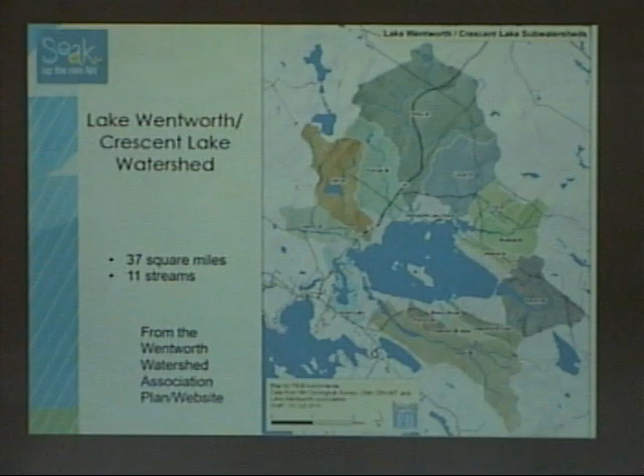Think back to maybe elementary school and the water cycle—it's a really nice natural cycle. It rains, the water flows downhill, some of it infiltrates into the ground and gets into the water body, some of it evaporates and goes back up, and you have this cycle going around and around.

Then people come around and start developing an area. They put in all these hard, or impervious, surfaces—roads, parking lots, buildings, rooftops. If you imagine what that's doing to that natural cycle, it's really interrupting it.

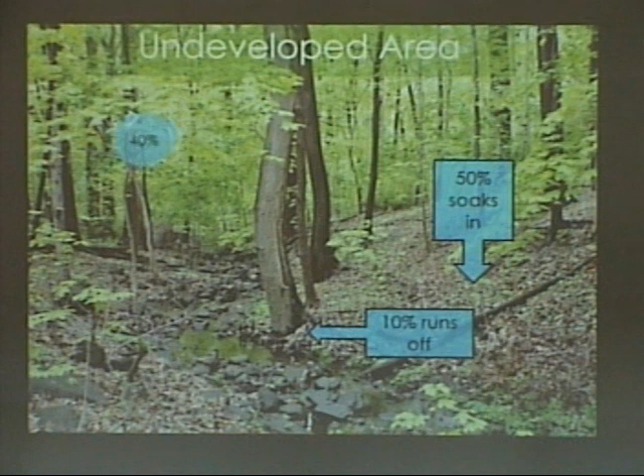Another thing to think about with the water cycle: in a nice undeveloped area like a forest, with a great canopy above, an understory, and a natural mulch of leaves below, 50% of the water soaks in when it rains. Only 10% of that water actually flows off into the stream—the rest infiltrates in. And 40% goes through that water cycle with the vegetation, transpiring.

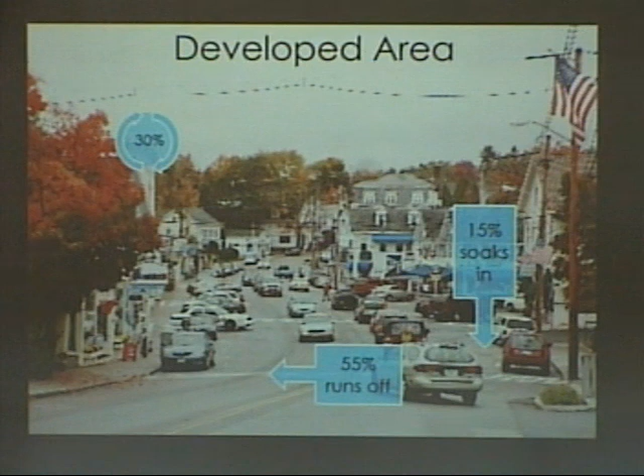Here in Wolfeboro, when you put in all this impervious surface, these hard surfaces, it creates almost a flip of what's happening with the natural cycle. Now only 15% of the water is soaking in, and 55% is running off—into Lake Winnipesaukee, into a storm drain, maybe going directly in. It's not soaking in anymore, it's not infiltrating. And because we don't have as much vegetation, there's a lot less of that natural cycle happening above.

So all this water that's running off these surfaces is what we call stormwater, or stormwater runoff.

Stormwater itself will sometimes infiltrate, but when it's running off, we call it stormwater runoff, though I'm going to just refer to it as stormwater. Some people talk about non-point source pollution, and there's a lot of other technical ways to describe it, but we're going to call it stormwater. As it runs across surfaces, it picks up a lot of different pollutants along the way. Think about what's on a roadway, in a parking lot, even on a grassy area where it's compacted, it's picking up oil, grease, fertilizer, salt, sand, all kinds of things.

So I'm going to talk a little bit about why we should really care about this. In New Hampshire, we really expect our water to be clean enough so that the fish will survive, that all the little organisms that they eat will survive. We also expect to be able to go swimming without really worrying about getting sick in our water bodies.

At the Department of Environmental Services, we do a lot of monitoring out there where we're testing water, and you guys do here on the lakes too. What we find is that when a water body doesn't support some of these things that we want it to support, like drinking, fish, or swimming, then we call it impaired. It's too polluted for what we want to use it for. And there are a lot of impaired waters in New Hampshire.

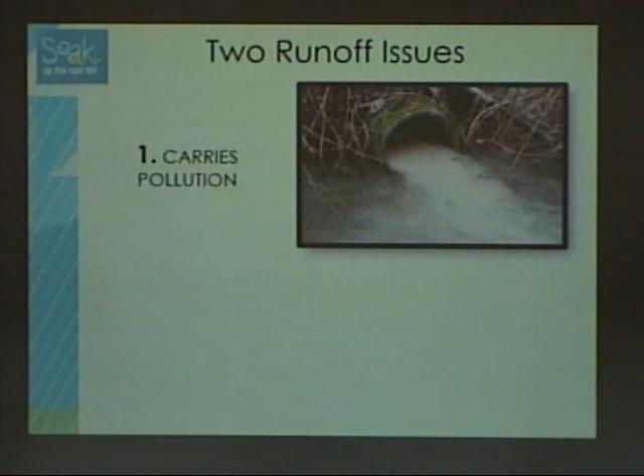I'm going to break it down for you into two issues that we're concerned about. The first one is that it's picking up pollution and carrying it to the water body. The other one is that there's too much water because it's not infiltrating into the ground, it's running off.

When you think about water pollution being carried, it could be water flowing over a compacted grassy area or flowing right into a water body, picking up pollutants along the way. It could be flowing along a roadway, a dirt road, or even a paved road and getting into some sort of trench or swale, picking up sediment or dirt along the way. Or it could be coming from a nearby parking lot where there's a storm drain, picking up all the different types of toxins and pollutants related to cars and trash, cigarette butts, going into the storm drain.

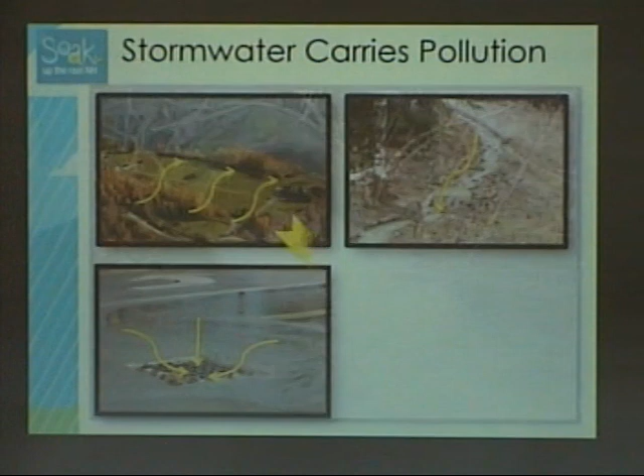No matter where it's coming from, though, and however it gets there, it eventually ends up in a nearby water body untreated. A lot of people think it's going into a storm drain and getting treated. There's maybe some catchment for sediment, but the water is not actually getting treated.

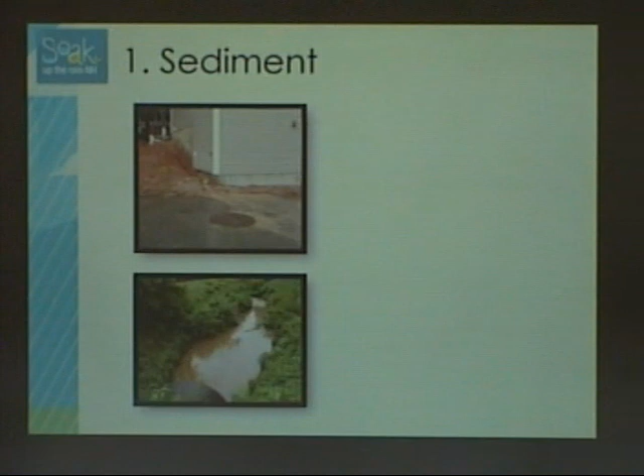So I'll talk about four different causes or sources of pollution that you might want to think about, especially things related to landscapers. The first one would be sediment, which could be from pretty much any property that has an issue with erosion. Maybe the vegetation isn't growing well, or somebody's building a house, there's construction going on, or it's a roadway—there are all kinds of different causes. It seems harmless, it's just dirt, but it is not, because when it gets into the water bodies, it can create a problem, actually making the water very cloudy. It's difficult for the fish to see, and it smothers a lot of their habitat, the vegetation, and the smaller bugs.

The other one is nutrients, and we talk about nutrients as phosphorus and nitrogen, which is something landscapers see all the time. Normally that's good because it makes plants grow—we need both phosphorus and nitrogen. But when there's too much that gets into our water bodies, we run into issues with the vegetation taking over. I'll give you a little demonstration of this. Phosphorus and nitrogen could be coming from too much fertilizer, or from a septic system. The plants start to grow, and then in the water bodies they start to grow too much, so you get that problem with algae blooms.

It's actually feeding, if you have invasive species that aren't supposed to be there, it's feeding those a lot more nutrients, causing them to take over and grow like crazy. Then the water's cloudy, doesn't get as much sun, and eventually plants start to die off. The microorganisms are decaying them, eating all those plants, and taking up the oxygen.

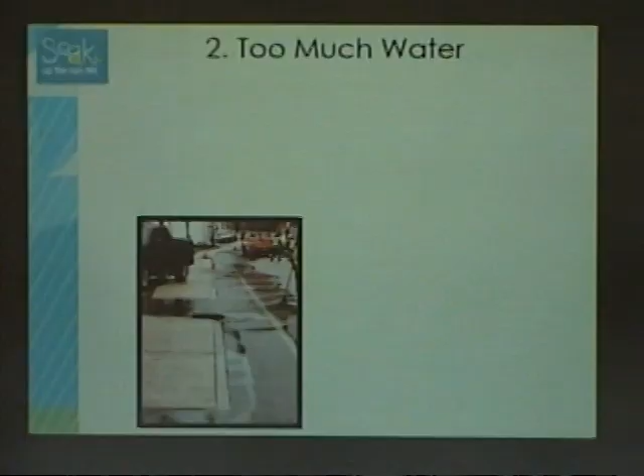So that's the pollution side, and then there's the too much water side of this. That really is an impact because as it rains, most of you probably noticed our storms are more frequent, more severe, we're getting these downfalls that happen very quickly, and then they hit this impervious surface and don't have an opportunity to soak in. So they're really taxing our infrastructure, our stormwater systems, our catch basins, and also the natural infrastructure. This is Newmarket last October, which was not a very bad storm, and it could not handle it.

So we have flooding, to the extreme a lot of times, where our infrastructure like our culverts and bridge crossings aren't big enough to handle them. So it's blowing out or destroying some infrastructure.

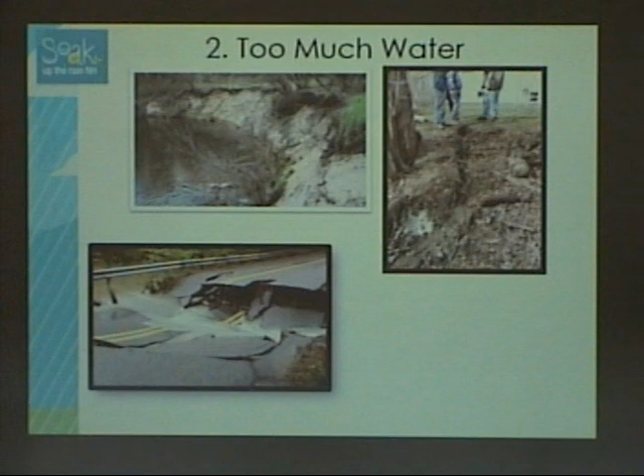It causes erosion when there's too much water. In cases where you have a stream or river near a lot of development and all the water goes to that stream or river at the same time, it becomes very flashy. That can cause erosion on the banks, and then the sediment goes downstream, causing problems down there. The trees start to become uprooted, they fall in, they're no longer a nice buffer, you no longer have that shade for all the organisms. It destroys roadways and other infrastructure too, so it's a huge issue.

And then the other extreme of it is that we've had droughts in certain parts of the state this past year, and it exacerbates that problem because you're no longer replenishing your groundwater.

So this is kind of bringing it down to the home level. This is a typical home, kind of like your backyard or whatever, and this gives you an idea of how it works.

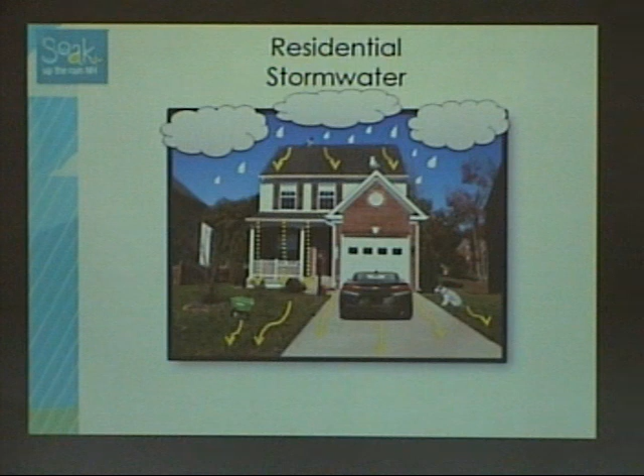It rains, the rain hits the roof. You might have gutters, you might not. If you don't have gutters, the rain flows over the roof, might go over the drip edge, goes down to a pretty compacted lawn, picks up any excess fertilizer. If you do have gutters, it's going to hit that driveway, pick up everything from the car, or maybe from the pet that you have that you didn't pick up the waste from. It drains then to the catch basin or directly to a water body.

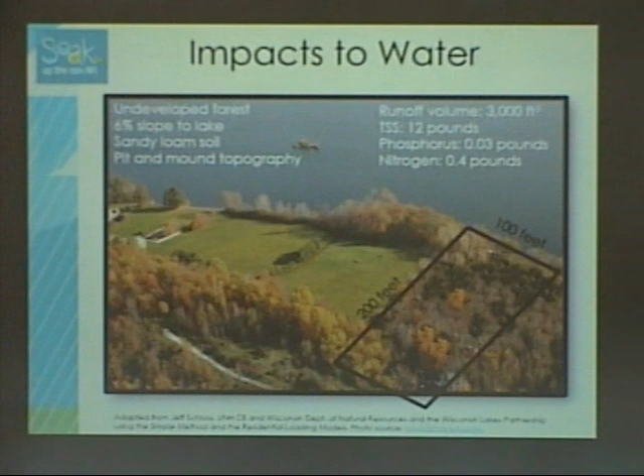So that's on the micro level. Here's another example of what happens when people develop a piece of property. We have this nice undeveloped piece of property, nice slope, some nice sandy loam. It hasn't been developed or cut in a long time. You don't have to think about these numbers other than they show you this is a natural environment. It has TSS, 12 pounds of sediment, and the phosphorus and nitrogen coming off that property is pretty low.

Then they come along and develop it, and we've got this very long driveway, a lot of impervious surface, a big house, and a nicely maintained lawn. But now we are basically creating much more runoff—5 times more sediment, 16 times on the phosphorus, and 7 times on the nitrogen.

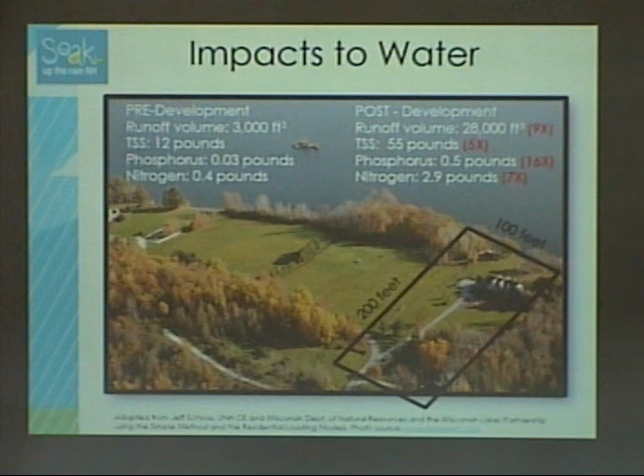So I think, Lisa, you're up next. I don't know if you have any questions. Lisa's going to talk about the next step—what to do and how to do it. Yes, Jack.

Early on, you referred to sediment as dirt. Is there some dirt that's worse than others, more of a problem? One thing I forgot to mention is the other problem with sediment is that it will pick up a lot of the different pollutants that are out there. So a lot of those toxic pollutants have a pathway to get into our water bodies through sediment. It will carry a lot of the things we're concerned about in addition to nutrients. There's things like roadway sediment, which might have some chloride in it. So that's another thing we worry about on that end. I don't know, are you thinking of something specific?

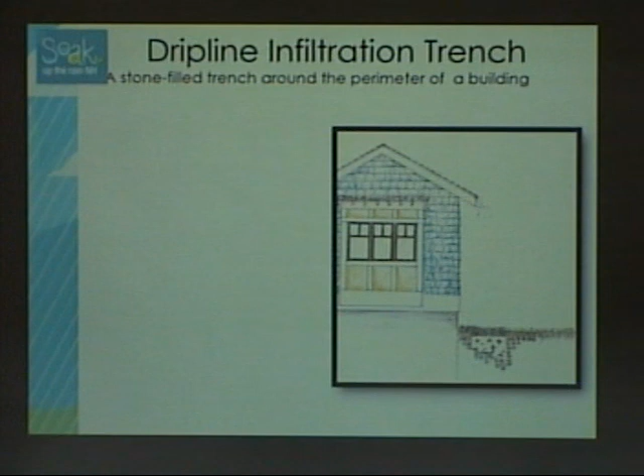You can put a perforated pipe in the bottom of it so the water moves out and away to some place where it can infiltrate, and that's part of the instructions you'd see in the booklet. If you were to see one, it might just look like a splash guard, but if there's a sub-base under there, it's trying to be an infiltration device.

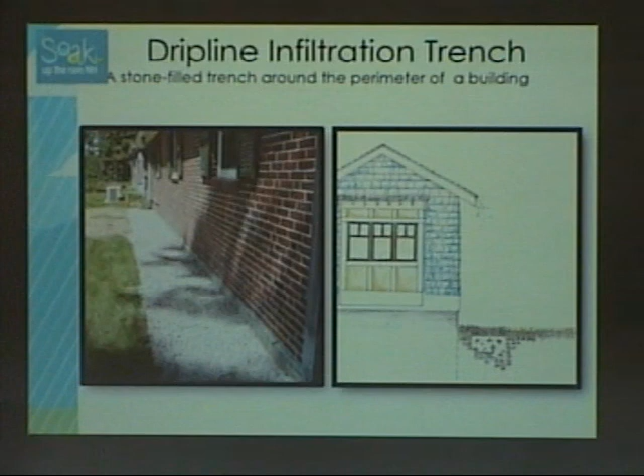A similar practice is a driveway infiltration trench, so that if your driveway is crowned such that water sheds off and runs down the edges, you could capture that water so it doesn't run down the road, as Barb was saying earlier. This is an example we partnered with Phillips Exeter Academy to work with their students on Climate Action Day, I think that was 2016 or 17.

There was water coming onto this driveway and moving down the hill into the Squamscott River. We worked with the students to install an infiltration trench on 2 sides. There's 3/4 inch clean drainage stone under there, and then we topped it with a decorative stone.

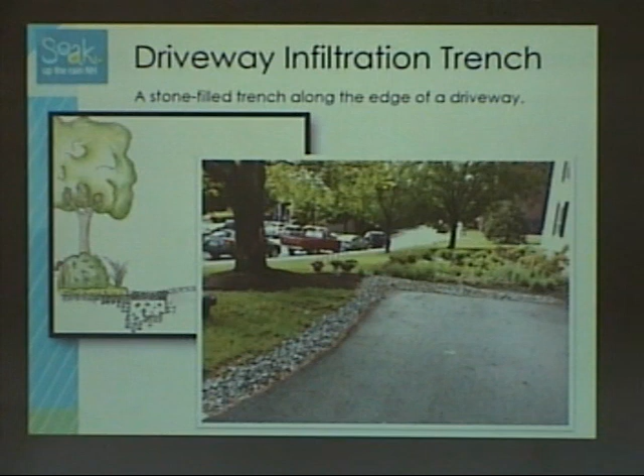We did one of these on a project in Greenland with our partner Soak Up the Rain Great Bay, where we put in 10 practices with them. They had a grant through the state, and one of them was a dry well on a property. You dig a hole, you line it with geotextile fabric to prevent soil from migrating in and taking up the pore space, so the water can move in there.

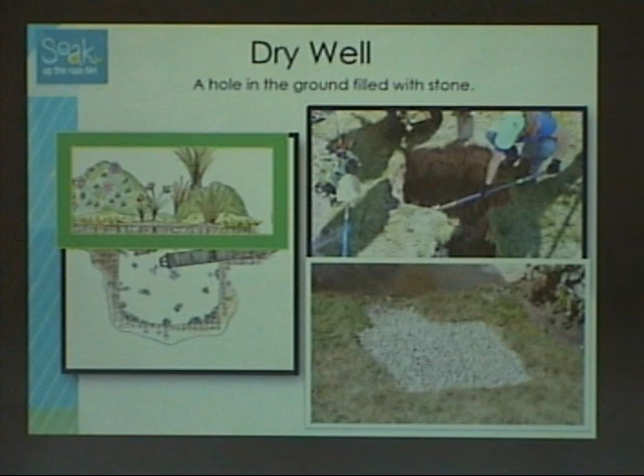In this version of the guide, we added how to enhance these practices wherever we could with vegetation. You can plant on top of a dry well. There are instructions that tell you to put a layer of fabric, some soil for a planting bed, and then to plant on top of it. So you're treating the stormwater, but you're also beautifying your property and adding the ecological benefits of native plants. If you use native plants, you could be adding pollinating plants and stuff like that.

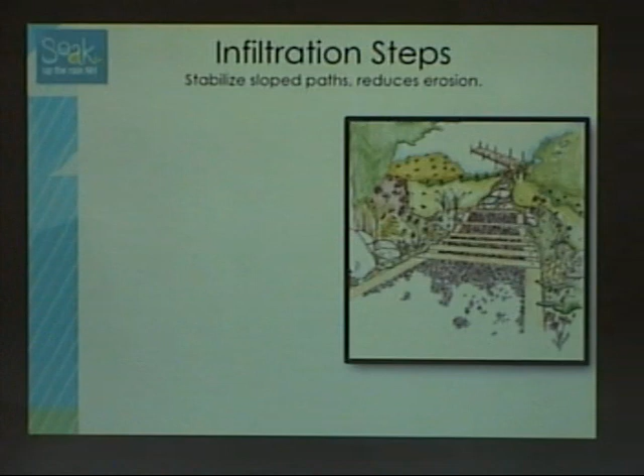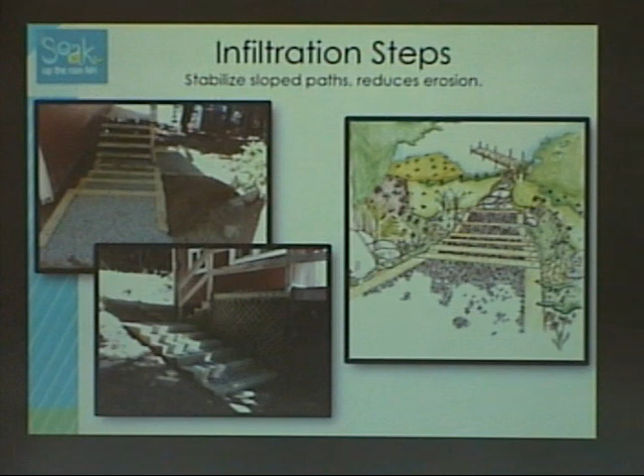These are built with, I think, 6x6 timbers, and they're pinned in with rebar and then backfilled again with that 3/4 inch clean stone, so the water can infiltrate instead of just tearing down and eroding.

Anything from plain concrete pavers to something more decorative, and I think there's a guy in the back there that's got lots of different types to show you.

Rain gardens are the big deal right now.

Have any of you put in rain gardens with clients or at your house, or had interest in them? Any landscapers have had clients asking, do you know what a rain garden is?

A rain garden is basically a perennial garden that is sunken down below grade. The water is directed into it so it can slowly soak into the ground.

This is a picture of one that we did in Greenland. I have a little graphic and then a picture of that. The key feature of a rain garden is really that ponding area. You can see the top of the grade there, the grass, so that's the original grade. And there's the top of my garden, so there's space between there.

Along comes a storm, and that rain garden fills up. Then as the storm passes and the sun comes out, that water slowly soaks into the ground.

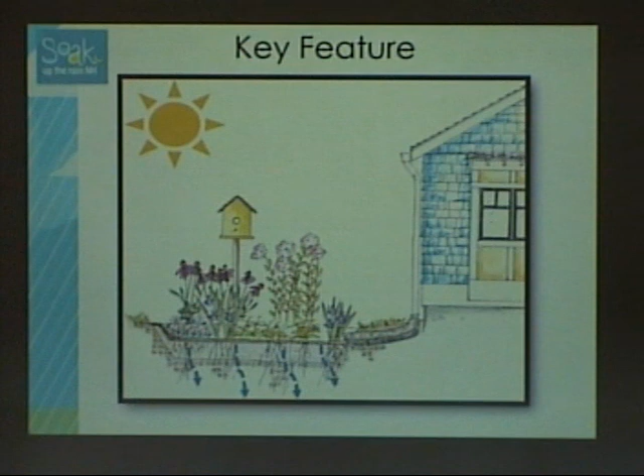Other than that, there are some features like the inlet and an overflow outlet, but you can put just ordinary perennials, but common perennials in there. We worked with Cooperative Extension to develop a rain garden plant list, which is on the back table. So if that's something you're interested in, be sure to get one of those.

Of course, they do need maintenance. All of these types of practices need some sort of maintenance or another, and that's addressed again in the homeowner's guide. We certainly write about that.

So those are the 6 infiltration practices. Like I said, they're meant specifically to direct the water right to them. But sometimes you don't have a place where you can infiltrate the water, but you need to do something about it. You don't like where it's running. So there are 4 additional practices for collecting it or directing it or otherwise trying to help out somehow.

For example, the good old-fashioned rain barrel. Just to capture it and store it for later, or put a hose on it and direct it to where you want.

This is a project we did again with Soak Up the Rain Great Bay, where we had a roof. The big deal about rain barrels is they fill up really quickly. Less than 100 square feet of roof with 1 inch of rain falling on it will fill up a rain barrel really quickly. So in this case, the homeowner was able to split the gutters so they went in 2 different directions, and we put rain barrels at each end.

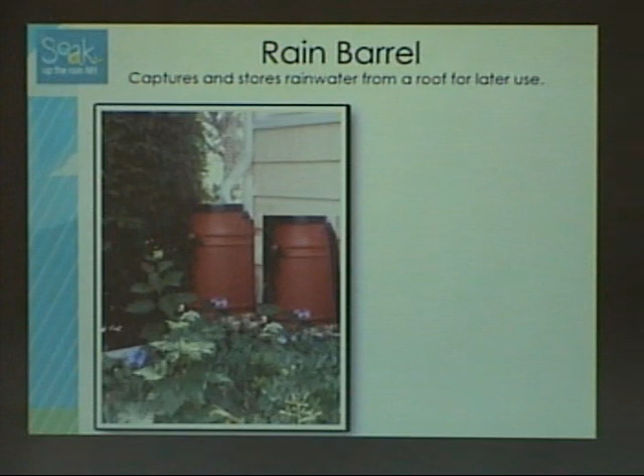Water bars, I think, are so cool. I love putting these in. They're for a sloped area, not super steep, but you may see these if you go out hiking, on trails or at camps where you have a slope in maybe a high use area, and the water is slowly making its way down.

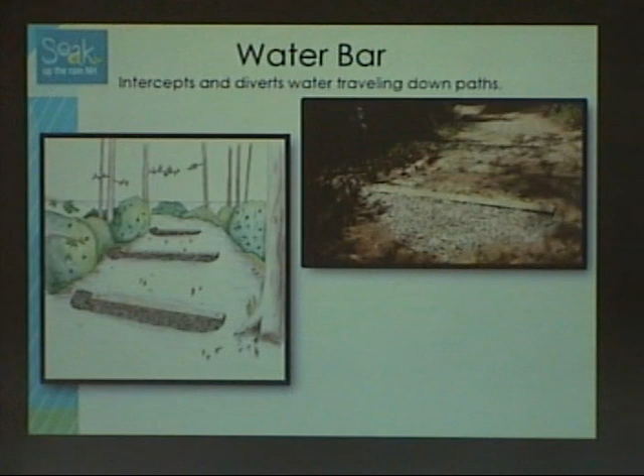This is the type we put in at Camp Robin Hood up in Lake Ossipee, where you put them at an angle on the slope, so as the water comes down. I should also say that behind the bar, you dig a trench and fill that with that same 3/4 inch stone. So as the water comes down, it hits the bar, collects in that trench area, and then moves off into a vegetated area.

You can see they're done in a series. I think we put 5 in there.

And that way the water comes down, hits that bar, moves off to the side into a vegetated area through that trench. The rubber razor is there both to catch the water, but it's also nice because you can drive over it with bicycles, golf carts, or maintenance trucks.

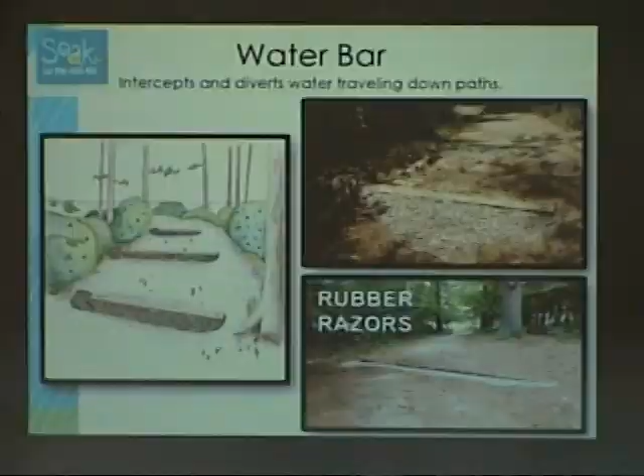One thing about water bars, though, is you can't use them on roads that are plowed because you'll just tear them up. But they're great, especially for wide areas of heavy use where steps, it's just too stretched out to put steps in, for example.

A vegetated swale is simply a channel that moves water along, but you put plants in it. We've all seen swales and ditches along the sides of the roads, but if you can put some plants in there, they help collect, they make pockets where water can collect and get absorbed by the plant or soak in.

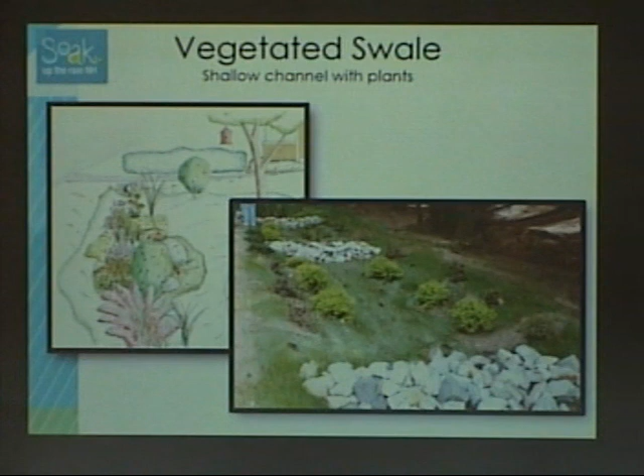This is a vegetated swale that was put in through our 319 program. It was a different type of program, but still a stormwater management program, where they added big riprap to create check dams. They help the water build up behind the check dam, where some of the sediment can settle out, and the water can maybe soak in during a big storm. Again, they're done in a series, so the water maybe fills up behind one, overflows, goes behind the other. Meanwhile, the vegetation is doing its job to pick up pollutants and soak up water.

A vegetated buffer is simply an area of vegetation between your landscaped area and the water body. So as Barb mentioned, lawns, a lot of people think, well, I have this big lawn and it's going to soak up water. After a little while, lawns can become compacted and shed water. I'm sure some of you have seen that, water just running off your lawn.

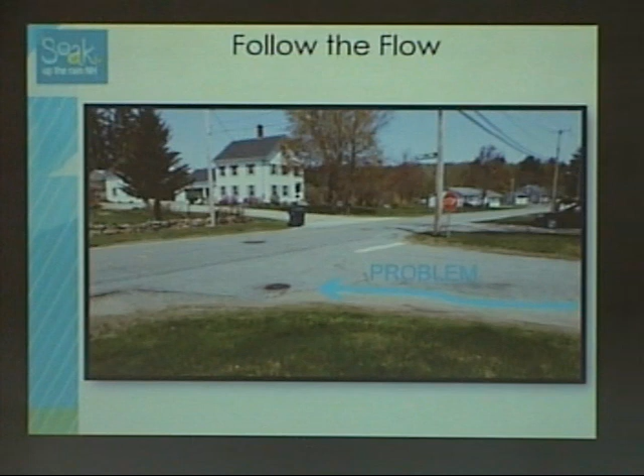Well, let me go back one more. Most of these on the front were going into a grassy area and the water was being somewhat soaked up. It didn't seem like a big problem. But here it was running down the driveway out into the road, and we asked, is there a problem? Well, yes, it was picking up that sediment and those other types of pollutants that Barb was talking about, dirt, oil, grease, maybe some toxic stuff from vehicles, going into that catch basin and dumping into the little river right behind it. So for us, that was a fantastic opportunity. That's that same downspout in the corner.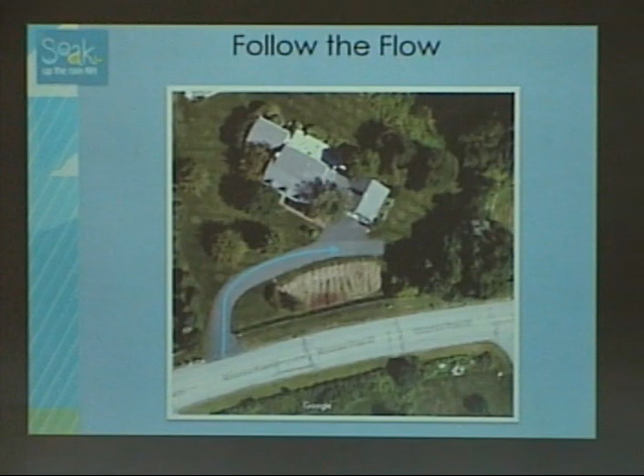This is, again, a project we did with Soak Up the Rain Great Bay, where this house was receiving runoff from a little bit from the road, from their big driveway. This is the garage down there at the bottom of the photo, where that water coming down the driveway was joining. You can see peeking out from the bushes there right next to the garage, there's a downspout. So roof water, too, was joining, moving across in front of that garage and going into this grate. We opened it up and said, what's going on here? Just following that flow.

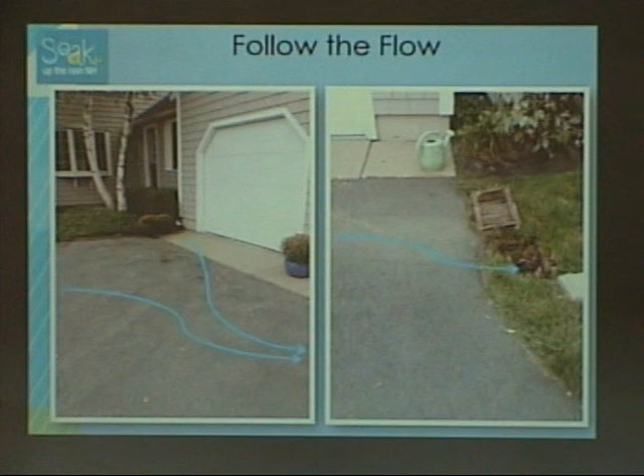And we found that pipe, if you can see that little pipe in the bottom of that grate. That was hooked to a pipe out back that was dumping all this water into this pond that overflowed into Great Bay. And if any of you know Great Bay, that has pollution problems of its own. So for us, that was an opportunity. You can see the white pipe there, that's the beginning of that overflow, the pipe that went out to the pond.

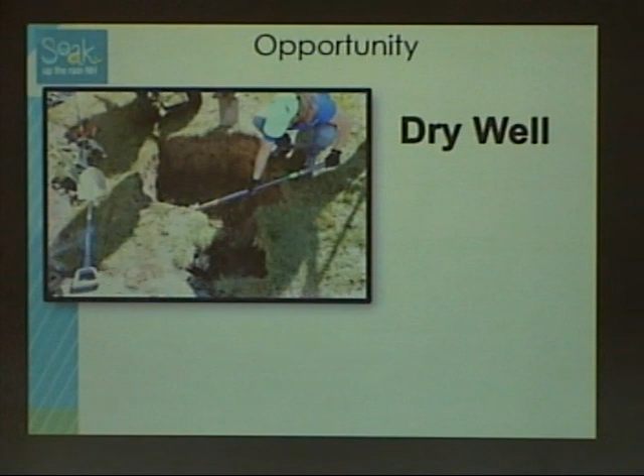So we directed the water past that and into a dry well. We dug the dry well, lined it with the fabric like I was mentioning, and then we put this overflow pipe in it so that any overflow, once the dry well fills up in a larger storm, it'll still go out to that pond, but meanwhile we've caught a whole bunch of it and we're soaking it up.

And then we stand there and we be very proud of ourselves and have somebody take our picture because we feel like we're doing good things.

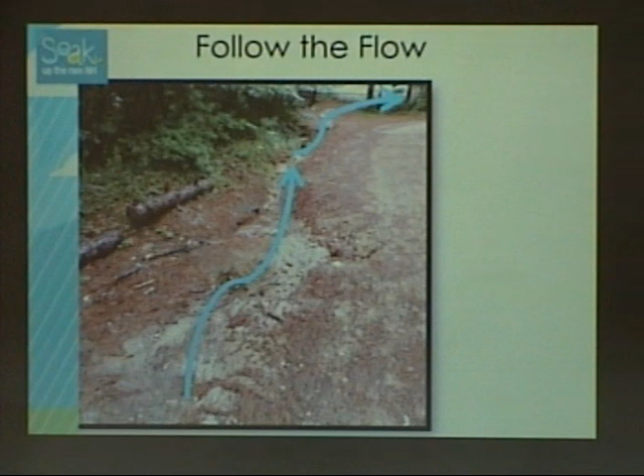This is the camp I mentioned, Camp Robin Hood at Lake Ossipee. This was an area, you're standing on top of the hill where there was some lodging, and there was this big path that people used in golf carts and the kids, and they would go down. There's another lodging building there, right at the top of the picture, you can see a little bit of white there. This stormwater was just tearing down this hill, wrapping around the building, and coming around the corner, and again, tearing down.

They had some sort of steps there, I don't have the full picture, heading down toward the lake. You can see they took a downed tree that was on the property to put it across there to try to block it off. So we thought, wow, this is not only a great opportunity to do something about the stormwater, but it was a great opportunity to work with the campers.

We partnered with the Green Mountain Conservation Group. She facilitated this project, and we worked with the campers and counselors to rehab where the water was coming around the corner. I didn't show you that very well, but there were some steps there that were just filled with sand, muck, and pine needles, so we cleaned those out and retrofitted some stormwater infiltration steps.

So that left-hand photo is that hill that I showed you at first, and those are the set of water bars we put in. And then we put the infiltration steps along the side there to capture more of the stormwater that was coming around.

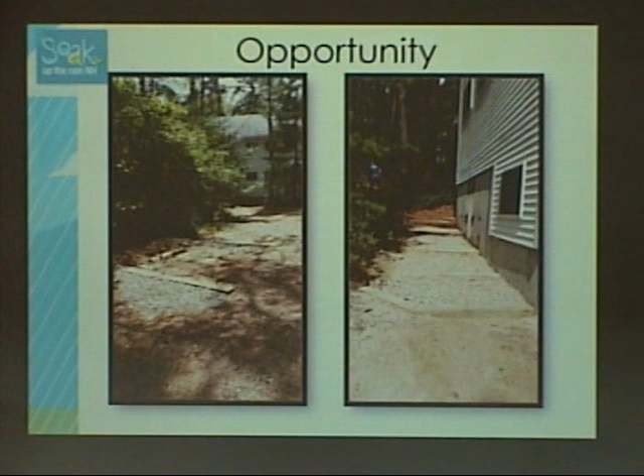And I understand that you have milfoil in Wentworth, so the fertilizer not only will cause overgrowth of the native vegetation, your natural pond weeds, but also of those invasive species like milfoil.

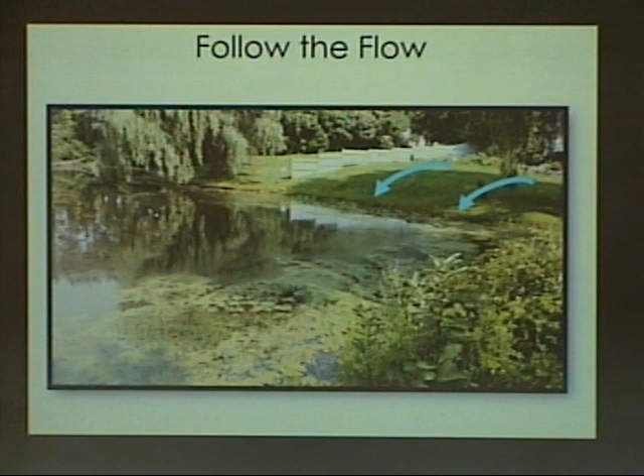So if you have overgrowth, algae, as Barbara mentioned, can have algae blooms in ponds and lakes. And I always say green lawn, green pond, because we just see it over and over again.

So real quickly, I also want to say that when we decide okay, we see a problem, an opportunity, we want to know if the soil will soak up the rain. So there's 3 types of tests that we do.

The first is a simple perc test, which I'm sure most of you are familiar with. We dig a hole, we fill it up. We usually let it drain out once and fill it up again just to make sure we get a really good test. Especially for a rain garden, you want that 12-inch deep hole to drain within 24 hours. Other infiltration practices could have a slower infiltration rate, but you want to make sure the soils will soak up the rain. If that hole just has water in it for days and days, then you don't want to put an infiltration practice in there.

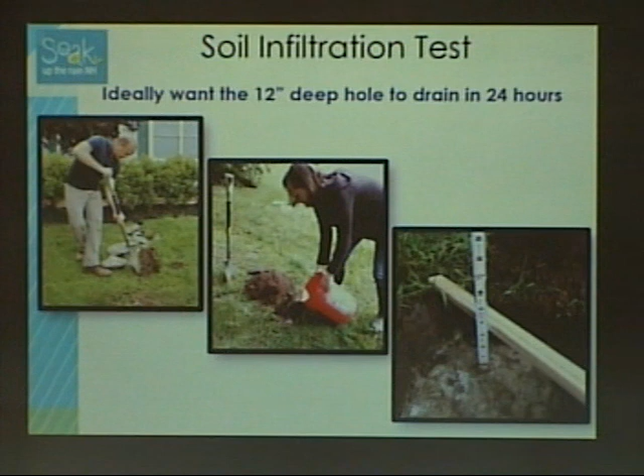A soil ribbon test is another test you can do. You get a handful of that soil, enough so it'll stick together, and you try to squeeze out a ribbon between your thumb and forefinger. A sandy soil won't make a ribbon, and that's good news for infiltration. If you can make a big long ribbon with that, you've got clay in that soil, and it's not going to be very good for infiltration. So you need to think twice about putting an infiltration practice in there. You could use one of the other types of practices, but maybe not infiltration.

This I recently added, I call it the soggy test. Is it soggy? Is it squishy? Is it spongy? A lot of times you'll have people that think wet areas are great places for rain gardens, and they absolutely are not. You want to put rain gardens where the water will move in and soak in, not where it will stay wet. So if at any time of year, for any number of days, an area stays soggy, squishy, or spongy, just say no to infiltration because it's not the right thing.

I'm going to drive this point home because if you have a client that says, why do I have a puddle in my yard days after the rain has stopped, is that a great place for a rain garden? Say no. We had this problem actually - somebody who went through this type of training tried to put a rain garden in a place where it really shouldn't have gone, and the property owner called us to help them figure out what to do.

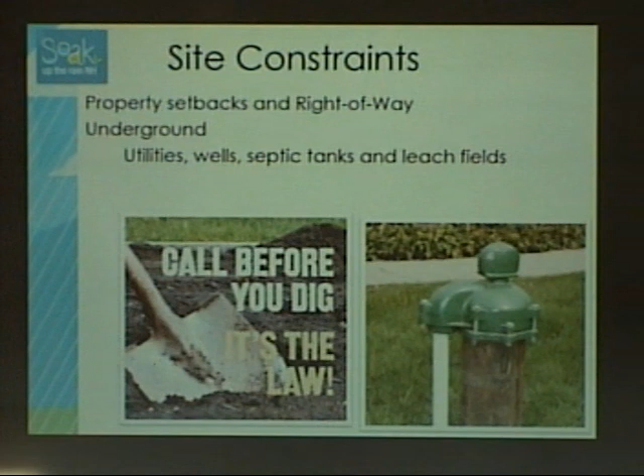So you want to stay away from wells and septic tanks, look for signs of big roots or big rocks that might impede your digging of a hole. Certain practices need to be on certain types of slopes or not. Of course if you're going to plant, think about your sun and shade. So there's lots that goes into it. And of course, what does the property owner want, what are their preferences? If nobody wants to maintain a rain garden, don't plant one there - but if you're a landscaper, maybe it's a great way to get some business. We'll put in this rain garden, we'll come back twice a year and take care of it for you.

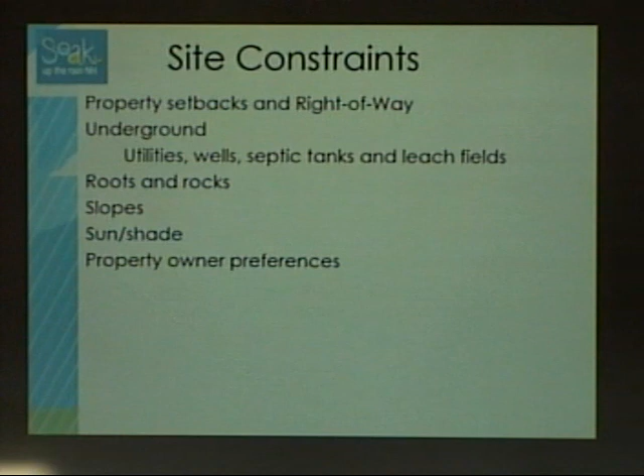So, of course, we don't expect you to memorize everything or have taken lots of notes and learned everything, so we encourage you to pick up one of those homeowners' guides to stormwater management in the back.

We also have this website, soaknh.org, or just look up Soak Up the Rain, New Hampshire. There is an EPA Soak Up the Rain program where they encourage these same types of things. It is a DES program, and if you've ever been on the DES website, it's not that beautiful or easy to navigate, but this website is completely different and unique. It's very user-friendly, very robust. We have flow charts that help you pick one of these practices by answering a series of questions, and tons of resources. If you want to look at somebody's yard and follow the flow like I just did, there's a field packet that tells you how to look at a house - the roof, the walkway, the yard, what's happening. So many resources on there.

And I think from here, Barbara is going to take over and talk a little bit more about the website. And should I pause for questions?

Okay, sure, yeah, thank you, Lisa. I'm just going to finish up, and then we'll have a few minutes for questions if there's time.

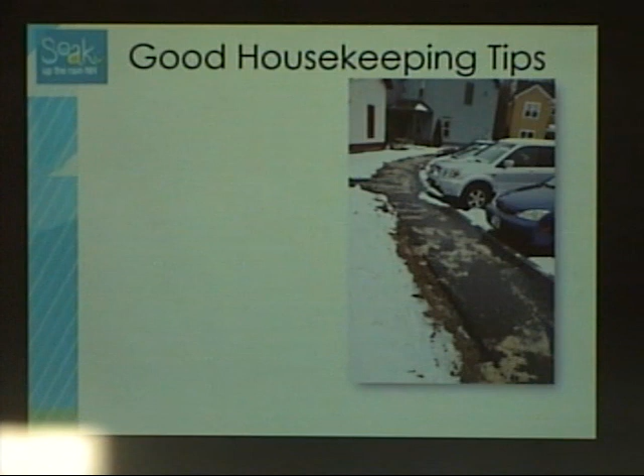This is a big issue in New Hampshire, and it's happening everywhere, but we have a lot of water bodies now that are actually impaired from chloride - there's too much chloride for the fish and organisms to survive. When we did data and research on that, we found that parking lots, private parking lots, are a big source. Highways and municipal roads too, but private parking lots and driveways can be quite a contributor.

So there's a program called Green Snow Pro, a certification program for people that do winter maintenance. You have to keep safety as your priority, but you can minimize the amount of chloride and salt you're putting down by being more efficient and effective, learning some of those techniques that are out there. The benefit is you actually get decreased liability, because you're certified, and if you show you're doing the practices the way you're supposed to, you're more protected on liability than you would be otherwise.

So we're really condensing a lot in here, and we're not able to go into a lot of things that some of you might be interested in, which is turf management and fertilizer, and some of the really great practices out there. There's a lot of science now behind what you can do to reduce the amount of fertilizer and what type of fertilizer you need, if you need any phosphorus, nitrogen, slow release, all those kinds of things. We have a ton more information on that.

I strongly recommend you take the training. We do the training about once a year in different parts of the state with UNH Cooperative Extension, and there is a certification that you get listed on their website as having taken the training. That's a little bit more than what you are getting today, and it's just really a great opportunity.

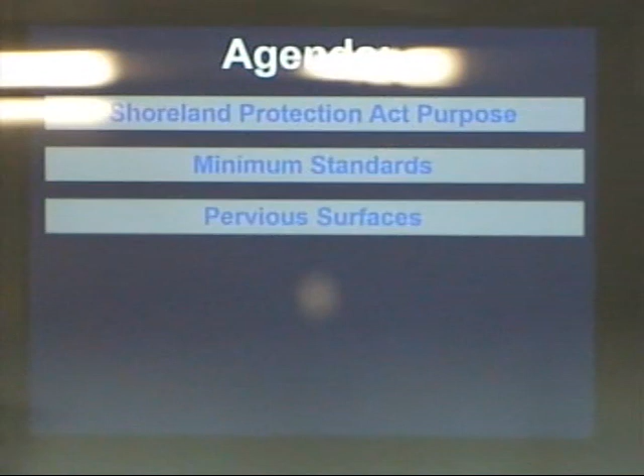We're going to talk about the Shoreland Protection Act, the minimum standards. I'm going to touch upon pervious surfaces—Barb talked about those a bit. We're going to look at the shoreland permitting process, and I'll touch quickly on erosion controls as well.

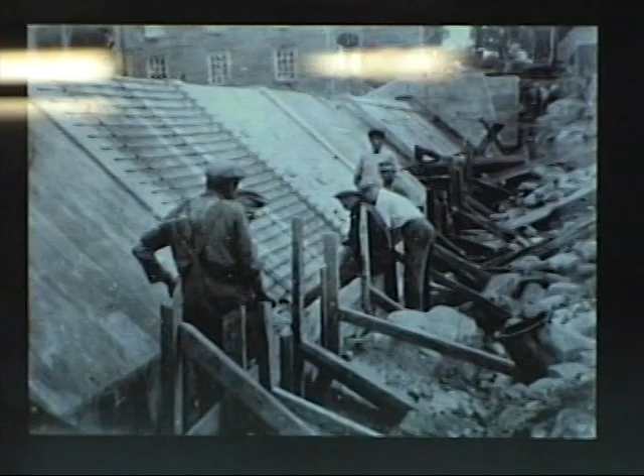Let's jump right into the Shoreland Protection Act purpose, the intent of the law. Once upon a time, a water body was inhabited just by Native Americans, and we arrived and started to install dams and raise the level of our water bodies. When you look at many of the water bodies, they were predominantly vegetated. The shorelines were primarily vegetated—nothing but large trees and natural ground covers.

Now, the take-home point is not that big houses are bad. What we're showing here is that there was a shift, a change in behaviors. Folks were bringing in a lot of the behaviors and lawns you'd see in typical urban and suburban environments, and putting them here in our rural areas of New Hampshire along our water bodies.

Shortly after we started rolling out these new behaviors and situations on our shorelands, we began to see a real decrease in water quality. Whenever you increase impervious area—surfaces that can't absorb and infiltrate stormwater—and eliminate natural vegetation, you see a decrease in water quality, because you're increasing the likelihood of stormwater entering or directly discharging into your lakes and ponds. Stormwater is your greatest threat to water quality today.

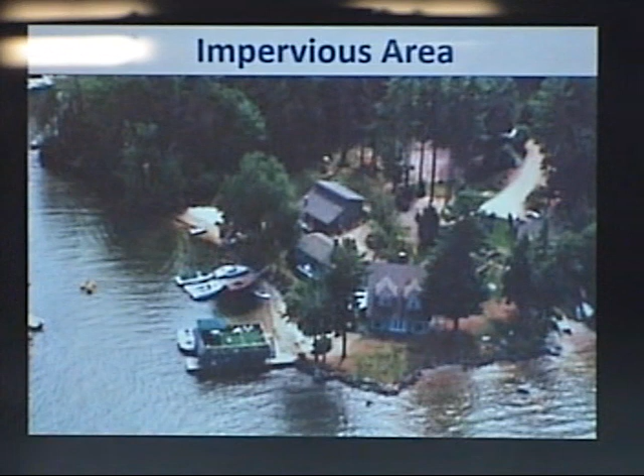When we look more closely at this area, you can see it's been carved up a bit—there's impervious areas and structures. Zooming in, you can see the shoreline has indeed been altered. Here are the gravel driveways. Technically they're considered impervious; they can absorb a very light rain event, but during a storm event there's sheet flow, stormwater racing across those surfaces.

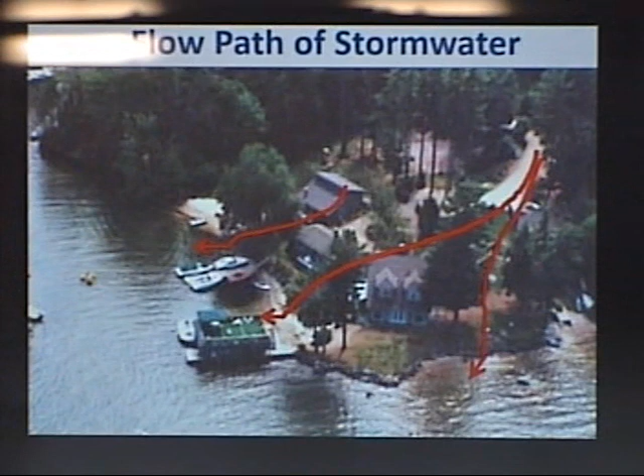So when a major front rips through with intense rainfall, there's stormwater racing off those surfaces, directly discharging into our surface waters—especially where the impervious area extends right down to the water's edge, or where natural ground covers have been removed and converted to lawn. What the Shoreland Protection Act is looking to achieve is to recognize those areas of our water bodies that are well-vegetated and retain them to the best we can, and also restore those regions already impacted.

Look at all the shade that these trees provide over these inshore waters. Barbara and Lisa were talking earlier about how providing shade over those inshore waters makes milfoil less apt to get established. Milfoil is not really a shade-tolerant species—it needs lots of sun to survive.

Here's a fantastic example of what we call a waterfront buffer, lots of natural vegetation within that first 50 feet. That's the real critical zone where the law is looking to retain natural ground covers.

Here's an area of a property that was restored. It was once a lot of lawn, a maintained area right down to the water's edge. A fair amount of restoration went into this site. Here's an excellent site where they put in additional vegetation to achieve greater levels of infiltration and more shade over the water's edge.

In general, just more of an environmentally friendly situation. So that's really the science and the intent of the Act. I hope if there's anything you walk away with today, you have a better understanding that the Shoreland Protection Act isn't just looking to save trees, it's really looking to maintain and restore vegetated buffers. It's looking to better manage our stormwater and provide some of the critical wildlife habitat that trees and natural vegetation provide along the shoreline. So now we'll get into the law itself and how the law actually achieves these things.

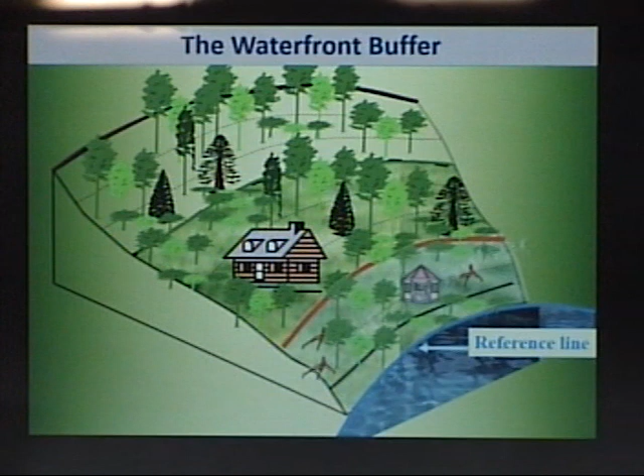If a property owner, developer, or landscaper has an interest in removing trees today, this is how it works. These are the limitations on tree removal. You divide the property up from the most northerly or easterly property boundary, always starting again from the most northerly or easterly property boundary. Then you divide the waterfront buffer up into these 25 by 50-foot grid segments, just like this. Score the trees based on their diameter.

Trees with a diameter of 1 to 3 inches are given a score of 1 point, 3 to 6 inches, 5 points. All trees 6 to 12 inches give a score of 10 points, and all trees greater than a foot in diameter are given a score of 15 points.

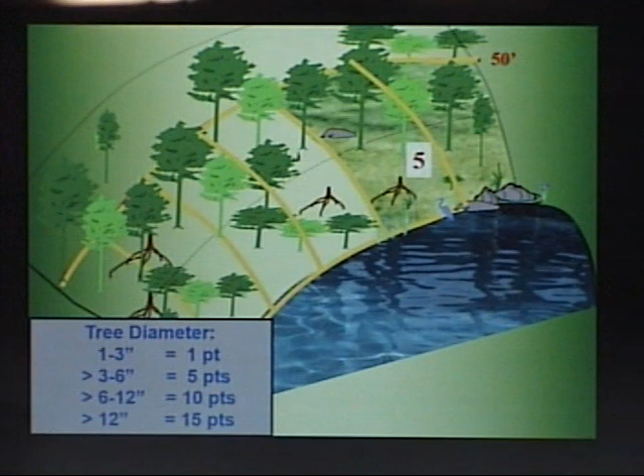If a property owner or developer has an interest in removing trees within any grid segment, they take a look at that grid segment, they score up the trees. Trees can be removed, provided that when the cutting is completed, at least 50 points of trees and saplings remains within each grid segment.

Here's a grid segment here that I quickly flagged out. There are two 50 by 25-foot grid segments. You score the trees, remove trees. If this view didn't suffice, trees technically could be removed, provided that 50 points can remain.

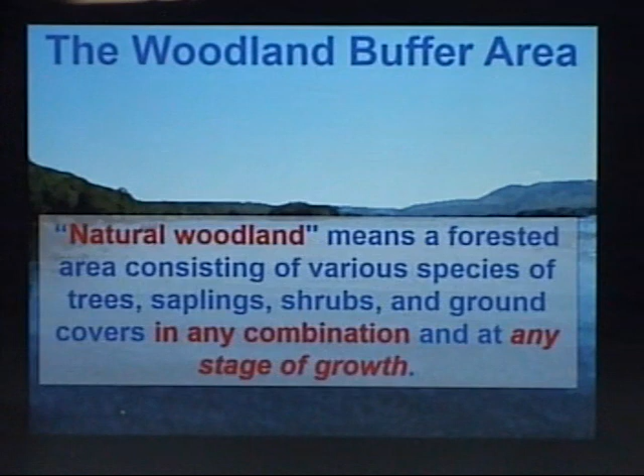Here's the woodland buffer area. Just wanted to speak to this limitation here. The natural woodland buffer is this zone between 50 and 150. Technically, 25% of this region needs to remain in an unaltered state, meaning untouched, pretty much allowed to grow relatively uninhibited. Just general maintenance, trimming and pruning certainly is permissible. But the law is looking to have some region between this zone here to at least remain untouched.

The law also recognizes that there are a slew of properties out there that may not have any area today that exists in an unaltered state. It may be completely structures, driveways, impervious surfaces, and lawn. And the law is very clear in that those areas, technically today, if they can continue to be maintained as they have historically, they're grandfathered. There's no provision in the law that requires additional plantings occur to achieve that 25% minimum.

So there's 25% here. Most folks through the shoreline permitting process today elect to do it in this fashion here. If you have a raw, undeveloped lot, you're putting in a new home, you allow along the property lines 2 regions to remain untouched and unaltered. It allows for a better view of the surface water and allows for privacy from your abutters and neighbors.

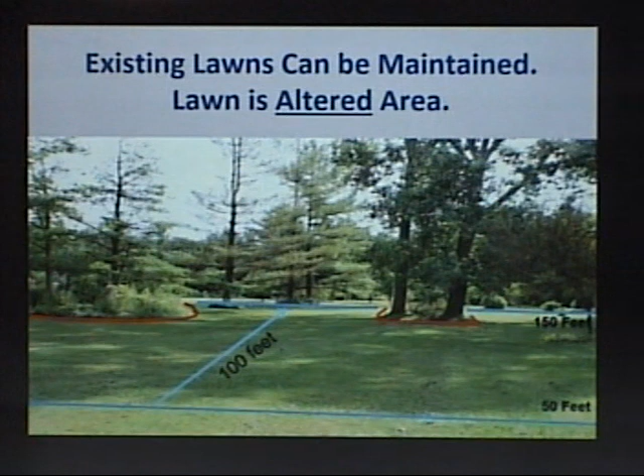The take-home point here is that because there is some, it means you can't further reduce it below what you already have. Let's say this is only 10%. Technically, 10% here may exist in an unaltered state. If this property owner, developer, or landscaper wanted to come in and put in some new features, some new walkways, patios, maybe a detached garage, very permissible. You just do so in a way that you don't build out structures into those areas that currently do exist in an unaltered state.

When the plans come into DES, those regions are shown on the plan, like this here. There they are, between 50 and 150. Those are the 2 regions that I just showed you that exist in an unaltered state.

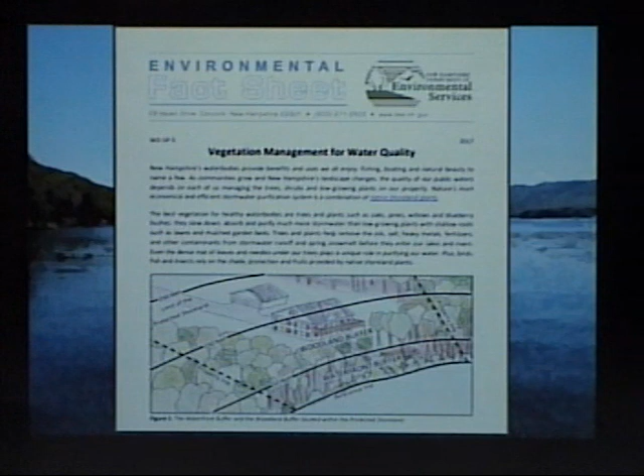This fact sheet is available on the Shoreland Program website. It's a comprehensive fact sheet document, or publication rather, that helps explain these limitations on tree removal.

Just wanted to move into impervious surface limitations. If you recall in the presentation before mine, they really touched on the need to address impervious surfaces, especially when we have impervious surfaces so close to water bodies. Impervious surfaces have that natural tendency to concentrate and direct and channel stormwater to our surface waters. So the Shoreland Protection Act looks to get a better handle of some of these impervious areas, their location, and when you exceed certain thresholds or certain quantities or certain areas of impervious area, the law mandates that certain pieces of stormwater management be implemented.

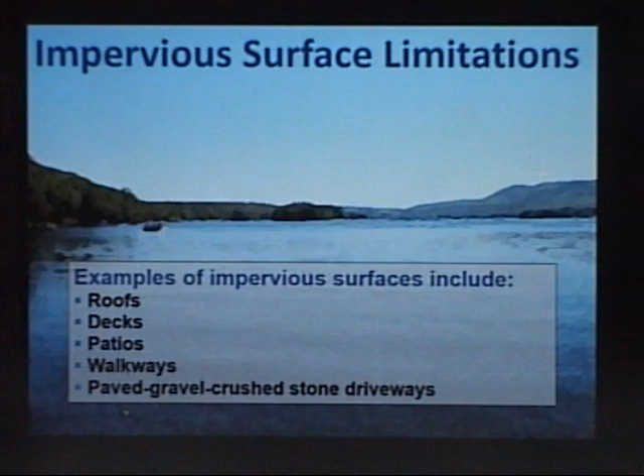Definition of impervious surface is any modified surface that cannot effectively absorb and infiltrate stormwater. So like I said earlier, even a gravel driveway technically is considered impervious area. Roofs, decks, patios, walkways, paved or crushed stone driveways, landscaping features, they're often impervious unless specifically designed to infiltrate stormwater. I'll touch on that in just a second.

So looking overhead at this lot here, the impervious surface area of this lot within the protected shoreland, zoomed in more closely, is the rooftop. That can't absorb the stormwater. It's the deck too, unless it's really designed to infiltrate stormwater down below it. And it's the gravel parking area out here. Those are the impervious areas of this lot within the protected shoreland.

Now what the law says is, okay, you're going to develop a lot within the protected shoreland. There are these impervious area thresholds. If more than 20% of your lot is going to be impervious, some things have to happen. If you take it a step further, and more than 30% of your lot is going to be impervious, some additional things have to happen, including some restoration. So I'll address each of these really quickly here.

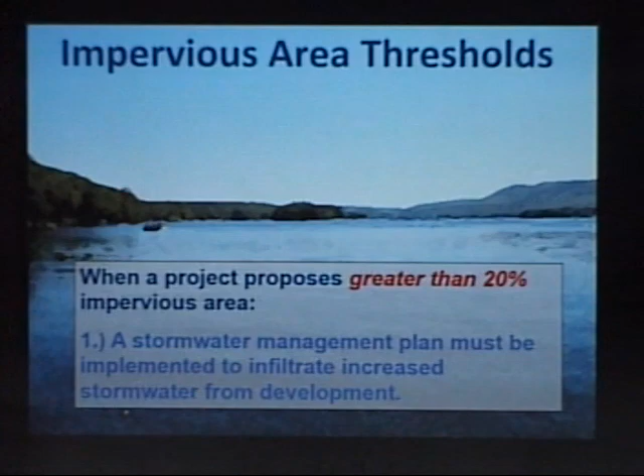If it's a project and you're proposing an increase in impervious area, whether it be a raw lot or an existing lot with a proposal to expand an existing home, expand a parking area, or build a detached garage, and you're going to push your impervious area over 20%, the law says you have to incorporate a stormwater management system to infiltrate that stormwater associated with development. I know the town of Wolfeboro itself has a local ordinance on stormwater, and it's actually a bit more stringent than the state law.

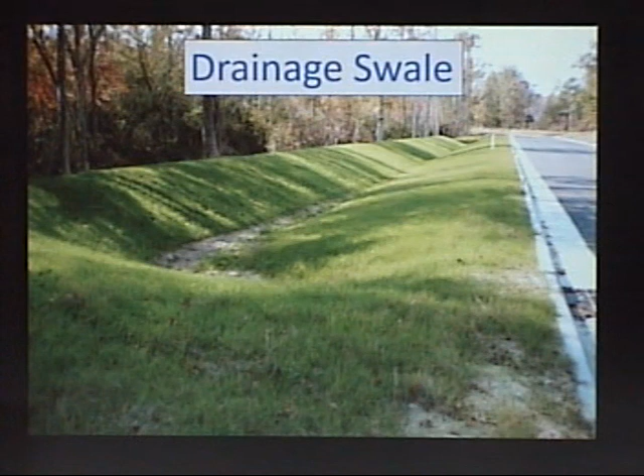Rain gardens here, taking the downspout, directing the water to a rain garden, dry wells, drainage swales. It's not really an engineering marvel here, you're just regrading and redirecting water so that you can slow it down and have the land absorb it. Feed the vegetation on land, don't feed the aquatic vegetation in the water. Again, these drainage swales here, an infiltration trench at the drip line of the house, designed in a way that it can absorb that stormwater and get it into the ground.

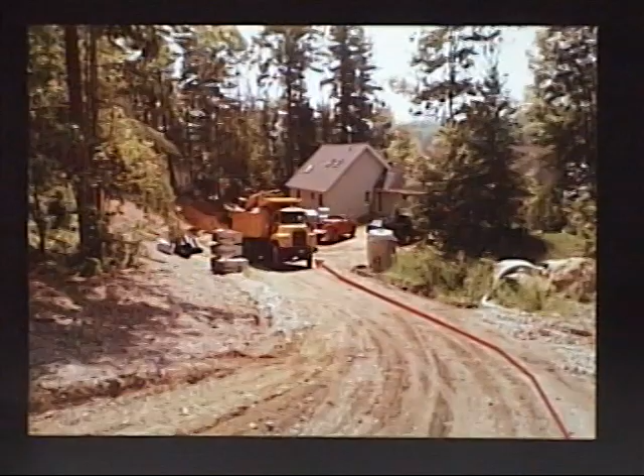Here's a site in Barnstead where these folks expanded the size of the home. You can see the expansion area down below. You have a steep drop down this gravel driveway, largely impervious. This project went over the 20% threshold. Down below here, a large portion of that stormwater from the gravel driveway and from that rooftop gets directed into this little depression area here. Any spillover drops down into the vegetated area in the background.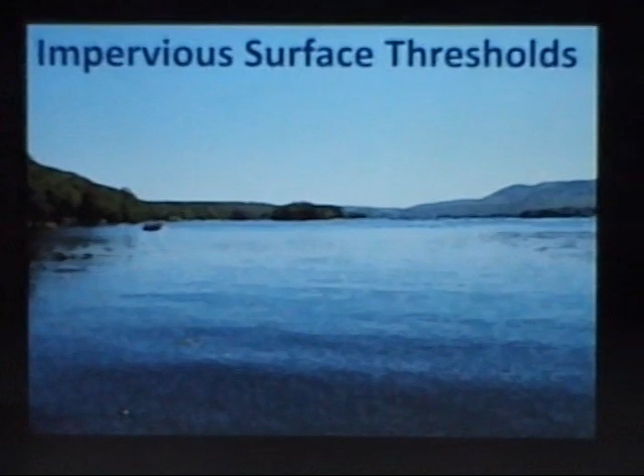Moving back onto impervious surfaces, let's say it's a larger scale project in a way that upon completion more than 30% of the lot within the protected shoreline will be impervious area. That's when two things have to occur. Now the stormwater management plan actually has to be designed by a professional engineer.

Most importantly, if any one grid segment within that waterfront buffer area does not meet that 25-point minimum score, that's when some landscaping needs to occur. The landscaping needs to be designed so that upon completion of additional plantings and revegetating, each grid segment now has 25 points worth of vegetation. There's a prescribed way to achieve that.

It doesn't have to come solely by way of planting 1-inch saplings. Lawn can be converted to natural ground covers, low bush blueberry bushes, shrubs, and shrubbery that's aesthetically pleasing, attractive, doesn't impede views, but provides a much greater benefit to the water in terms of intercepting stormwater and providing shade over the water's edge.

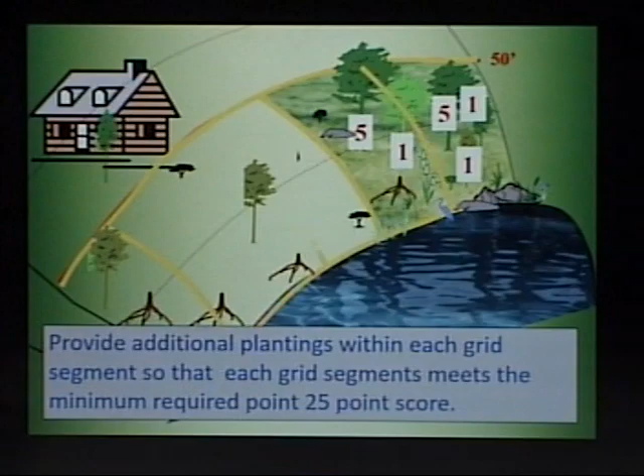So again, if we looked at this lot here, you can see a few of the grid segments don't meet that 25-point score. Within each of those grid segments, additional plantings would have to occur. When folks propose these types of projects, increasing the size of an existing home, expanding the home, or putting in a driveway, through the shoreline permitting process, on their plans they're required to demonstrate to DES how they're going to bring that point score up within each grid segment.

Looking at this lot here that I showed you a moment ago, you could only see a couple trees within one of those grid segments. A few of them certainly have no vegetation, it's largely lawn. If these folks develop this site in a way that didn't push them over 30%, that would not trigger the need for shore. If they did go over 30%, that does trigger the need to enhance each of these grid segments with additional vegetation.

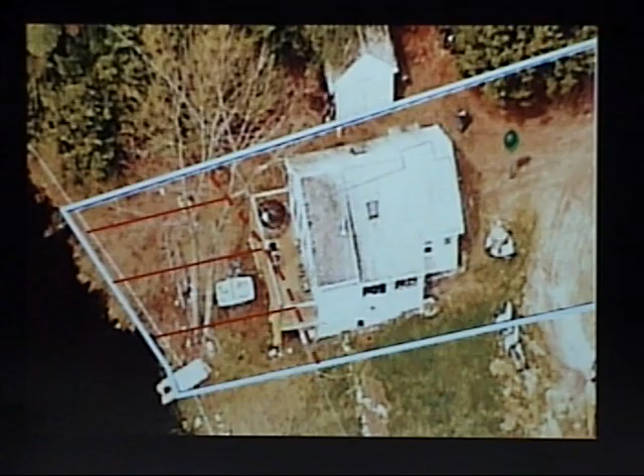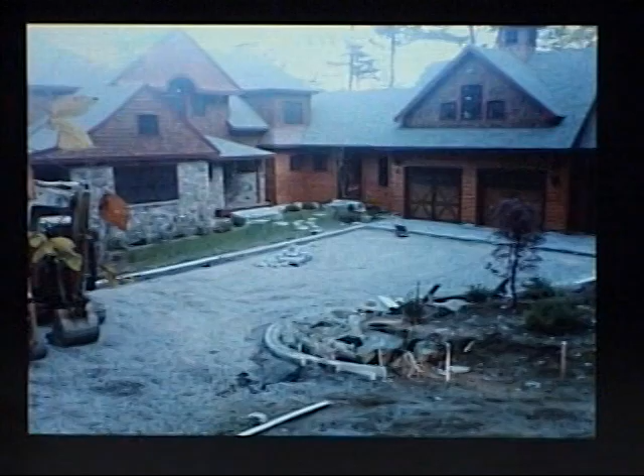So if you had a site like this that you were developing and you wanted to stay below the 30% threshold like these folks did—they wanted to build a larger home and had no interest in enhancing the waterfront buffer with additional vegetation—what they did is they took the driveway and converted it to a pervious asphalt. This driveway has the ability to infiltrate stormwater.

The shoreline permitting process, I'd like to touch on really quickly. I'm not going to go into all the gritty details, but these activities here are the types of activities that trigger the need for a shoreline permit. What requires a shoreline permit? It's these activities right here.

It's excavation with mechanized equipment, meaning you're bringing in mechanized equipment—bulldozers, backhoes, etc.—and you're digging into the earth. Bringing in fill, meaning you're changing the contour of the land. Or, lastly, constructing new structures. If you're constructing new structures in a way that increases impervious area, expanding those impervious area footprints, that's what triggers the need for a shoreline permit.

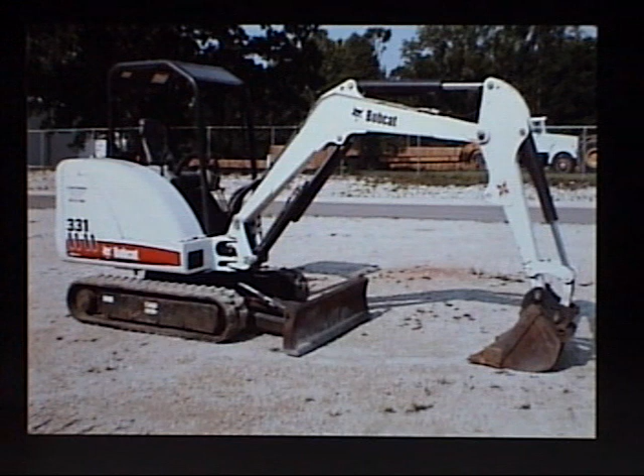So, digging like this with a backhoe—engaging in an activity like this—is what triggers the need for a shoreline permit. Even if you're using a small piece of equipment like this, a small bobcat, it's still mechanized equipment. If you're using just hand tools, and you're going to hack away with a bunch of shovels, technically that wouldn't require a shoreline permit, provided you're not adding any fill and you're not building out any structures.

Unbelievably, we had a guy a few years ago who wanted to put a new foundation in a house, and he insisted on not going through the permitting process. He dug the whole thing out by hand. All the power to him.

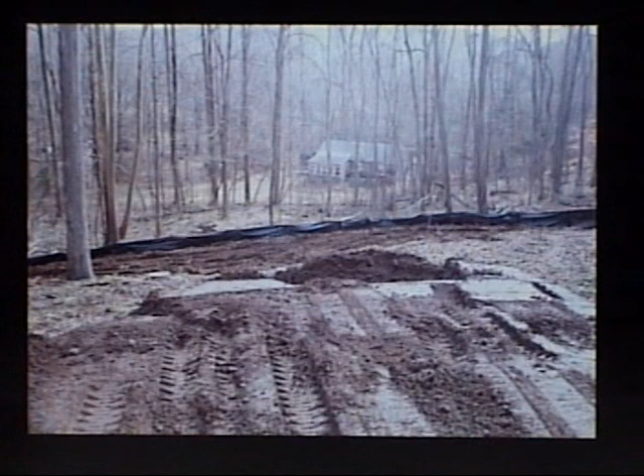This is not fill. If you have an existing lawn and want to maintain it, maybe smooth it out, fill in a couple little depressions, that's fine. If you look in the background, you can see some skunk cabbage coming up. It looks pretty wet back there, very likely a wetland, so you wouldn't want to put fill in the wetland. The take-home point: putting in a couple truckloads of loam to maintain existing lawns is not considered fill. But expanding the size of existing open areas, putting in retaining walls, backfilling, these are major changes in contour and require a shoreline permit.

Landscapers in the audience, don't be intimidated by the shoreline permitting process. If you haven't done so already, I'd highly encourage you to get involved with the permitting process. It would be a feather in your cap, a benefit to you, to tell prospective clients and landowners that you can take care of it, that they don't have to hire this out to some other professional consultant. You don't have to be a licensed land surveyor, you don't have to be an engineer. You, as the landscaper, can complete and submit the shoreline permit application for the property owner.

So again, don't be intimidated by the process. It may look a little daunting initially, but like anything, with a little practice and a little time, it's something you can work through.

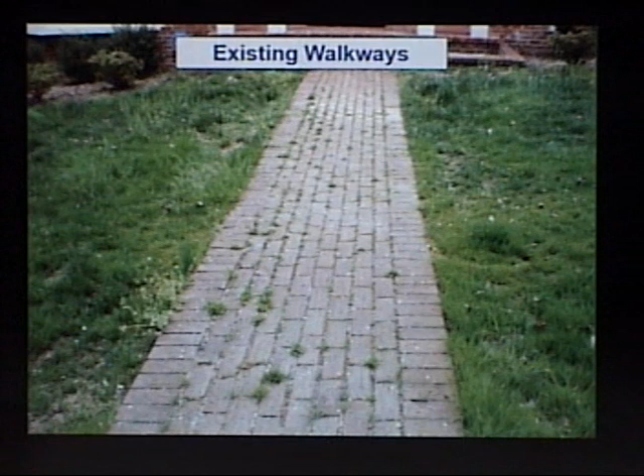Installing new retaining walls requires a shoreline permit, as do patios. But just to touch on existing walkways: replacing things in kind, replacing impervious surfaces within the same footprint, does not require a shoreline permit. If you're not bringing in an excavator to dig it out, not bringing in fill, not increasing the size, that does not trigger the need for a shoreline permit. Same thing with existing patios. Even if you bring a piece of machinery in to pluck these things up and drop in a new surface, if you stayed within that existing footprint, that would not require a shoreline permit.

Whenever you're working near the water or in the water, you're getting into a different law, wetlands law. Retaining walls and such can be repaired in kind, same height, same dimension, but that requires a wetlands permit rather than a shoreline permit.

I've got a recommendation for a new ringtone for you. Sorry.

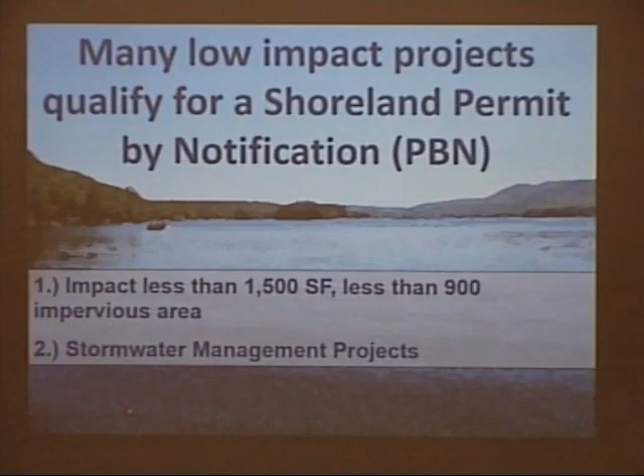It's a streamlined permitting process where you can get a shoreland permit by email in just 5 days. You show that you meet the criteria, you show us some plans, it's a relatively easy project.

If anybody here ever has any thoughts on a project, or landscapers in the audience, property owners, you need assistance with the permitting process, you have an idea, you want to talk about it, maybe meet at DES, or maybe you have a plan, you can fire me an email. I'd love to see the plan, we can talk about it over the phone, I can walk you through the permitting process. Take a look at the shoreland permit application, highlight those areas that seem to be trouble spots, and give me a call and we can talk about it and work through it.

Here is the typical permit. When folks do receive a shoreland permit or a wetlands permit, this is required to be tacked up like most building permits, so it can be easily recognized in a prominent location on site. As landscapers, if you don't see this, that's a problem.

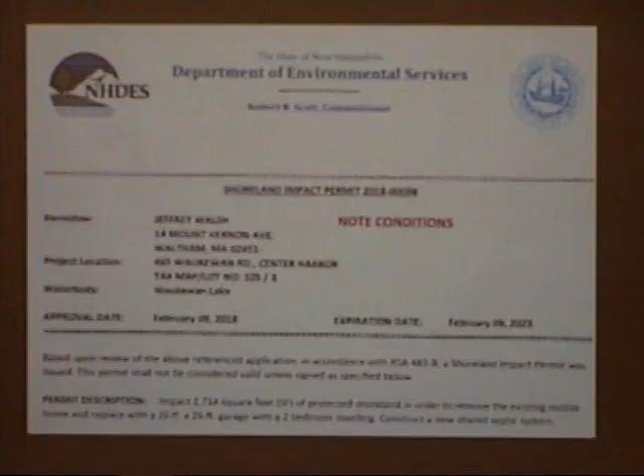Take a look at the permit conditions. There are very specific conditions on that permit that's issued. They speak to the plan that was approved. It's a dated plan that shows the footprints of those impervious areas. It also speaks to erosion controls.

Whatever web browser you use, maybe Google, the best way to get to the Shoreland Program website is just to punch in NH Shoreland Program. Don't go to the DES main page, it's a disaster, it's basically just lists of lists of lists. Just go directly to the Shoreland Program website. On this site there's a ton of useful information, particularly under the Hot Topics section.

You can click on 'Determine if a shoreland permit is required.' Depending on how you respond to some of these questions, this tool is able to determine if a shoreland permit is required, able to determine if you qualify for some of the exemptions, and help you determine if you qualify for the shoreland permit by notification process.

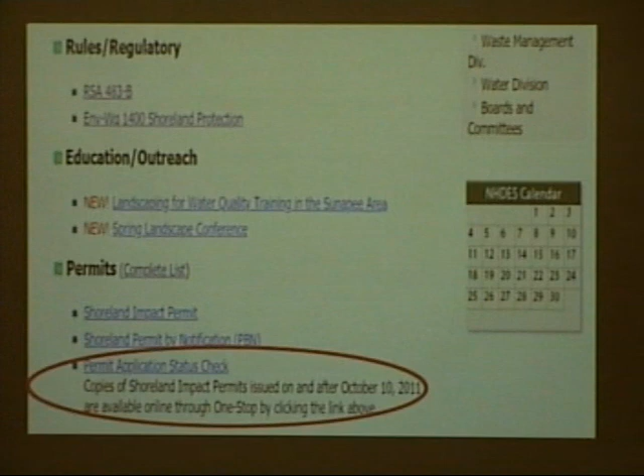Here's the permit application status check. If a property owner tells you, 'Oh, I have a shoreland permit, but I don't have it on site, you can't see it,' you can use this tool right here. It really gives you direct access to our database. You can punch in the physical address, the property owner's name, or even the tax map and lot number, and have direct access to see what permits have been issued. You can even download a copy of the permit, not the plans, but the permit itself.

Just wanted to touch on erosion controls, as I mentioned earlier, that all our permits are conditioned to use erosion controls. What are erosion controls? They are mechanisms put in place to ensure that if you do get a storm event while operating near the water body, all the silt and sediment that may wash off your job site doesn't wash directly off into the water. There are systems to retain the silt and sediment.

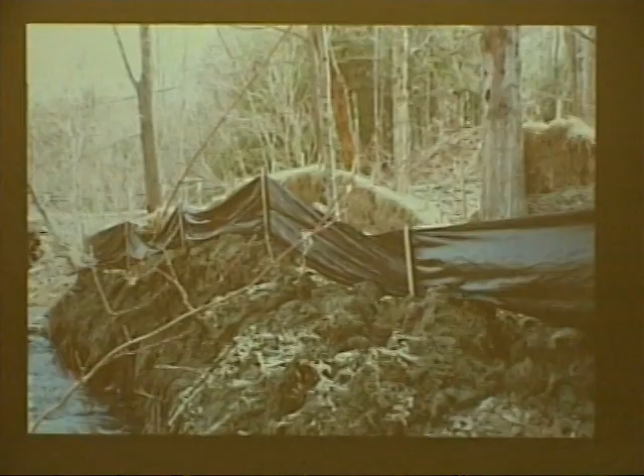This one here isn't installed properly. We call this more of a silt flag, just blowing around in the breeze here. It's not even tucked in, okay? At least make an effort to try to get it tucked in on the ground like this here.